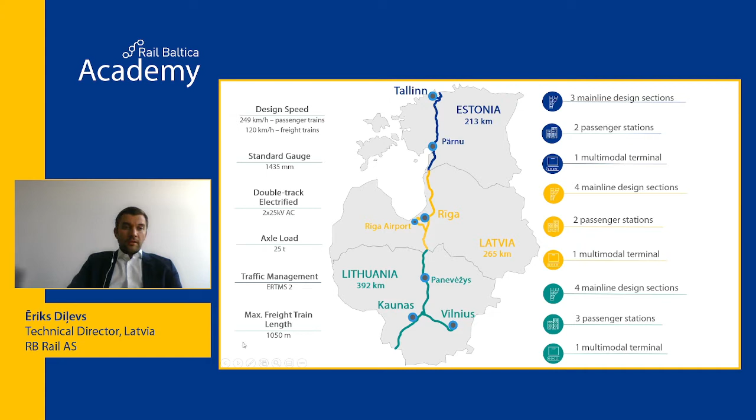Now let's jump to structures and how they're split across all 3 countries. As you see, Latvia has the longest mainline, so it also has the majority of structures. In Estonia it's a bit less, 121, and in Lithuania, 107.

We also have different separate structures which are not so common in everyday designs in the Baltic states. Here only several are listed, but we have more of them. Some of those I will present in the next slides, as I would say those are definitely among the top 10 construction objects on the Rail Baltica line. But of course we also have many others, such as passenger stations and so on.

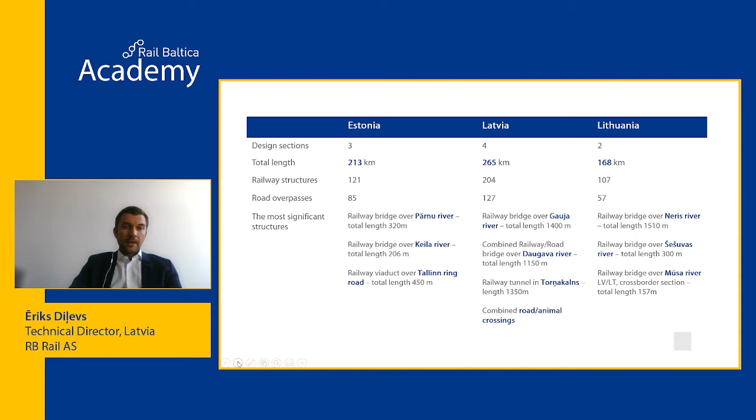Here you can see the breakdown of structures per each design section, as I mentioned before. In Estonia we have 3 sections, and here you can see the number of structures in each. Design section 1, the mainline through Riga, has 67 of those. In total, in Latvia we have 204. As some designs are still in the value engineering stage, the number might change slightly, but not significantly.

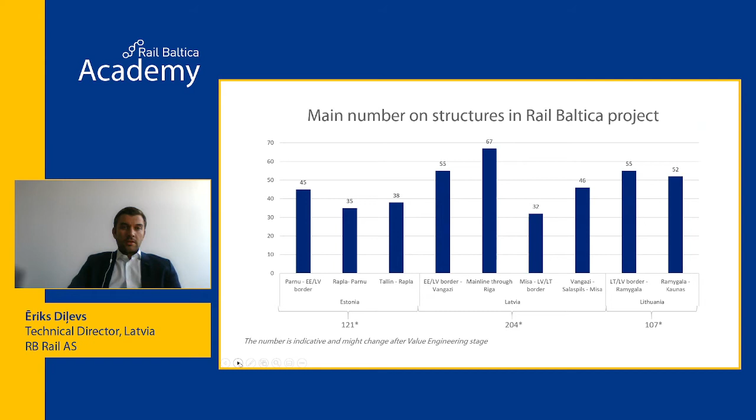So let's jump to the most interesting part. I'll give you an overview of each country. I have listed some of the most iconic structures worth thinking about for the future, which I would like to present to you today.

So here you can see we are adjusting 2 additional tracks of our Rail Baltica line, and here is the existing 1520 tracks, which is currently serving railway transportation for Tallinn city and for whole Estonia. And this will also be a multimodal hub in Tallinn, linking the Tallinn tram line, different bus routes, and other public transport systems.

Yes, so it's a very iconic structure to be designed and constructed. Currently it's under design stage, and the first stage of construction works is about to start this year. The consultant is the very famous Zaha Hadid Architects - I think you have heard this name. They have designed many iconic buildings throughout the world, and they also have a local subcontractor, Esplan. The contract value is 2.6 million euros. So yes, this is currently under design, and we have already reviewed the first incoming design deliverables.

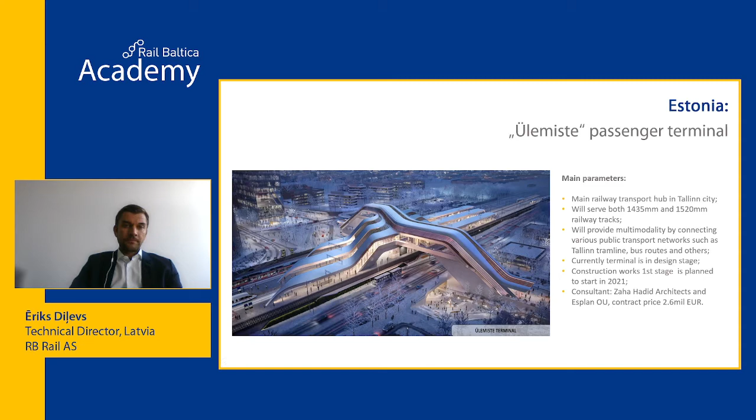Then if we go further down the line, here are some visualizations from our south section, which is Pärnu towards the Estonian-Latvian border. Here I have listed 2 different station examples. This is regional station Kilksama, where you can see the idea of how the Rail Baltica line will cross different villages and districts, and where we are providing regional stations. Those, of course, are not as big as you see on the right side - I will tell about this a bit later.

But here what I want to point out is that we are providing full multimodality even to this small station - there is an access road, a road overpass, a parking lot. So with this project we also want to ensure that there are proper facilities provided to the local inhabitants, so they can park their car, jump into the train, and go wherever they want. We need to provide full service for all the passengers and inhabitants in the regional districts we're crossing.

And on the right side, you can see Pärnu passenger terminal, which is of course smaller than Ülemiste, but also showing you an example of how we're going to provide this multimodality in Pärnu, linking different public transportation systems. And here on the left side, you see the Pärnu River, which lies right next to this station.

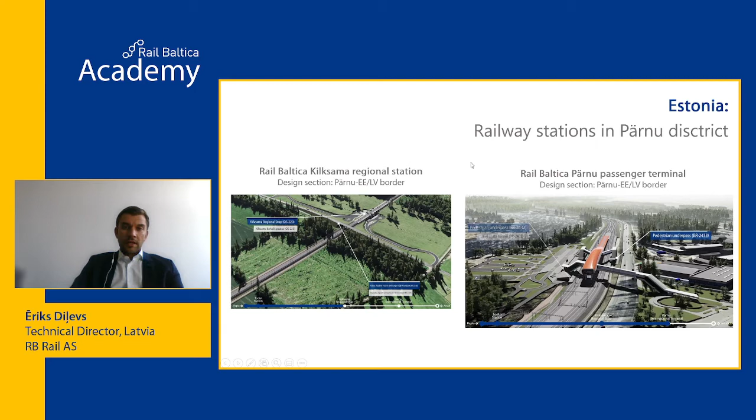Then I touched already on the Pärnu River - so one of the biggest structures in Estonia is the Pärnu River Bridge. Some of you may think 320 meters is not major, but this structure is also a bit unique in that the Pärnu River has challenges with high water levels, and there is ice flowing during springtime, and this is one of the challenges we needed to face, because there are local roads below the bridge deck, and the water level changes quite significantly. So we're carrying out different hydrological studies and investigations on how to tackle it, how to properly calculate the highest water level, ensuring the local roads are not flooded and ensuring safety.

So about the bridge itself - it's a steel girder with a concrete slab deck, 6 spans in total, and the middle span is 100 meters long. The bridge deck is 20 meters wide, and the height is 3.0 meters.

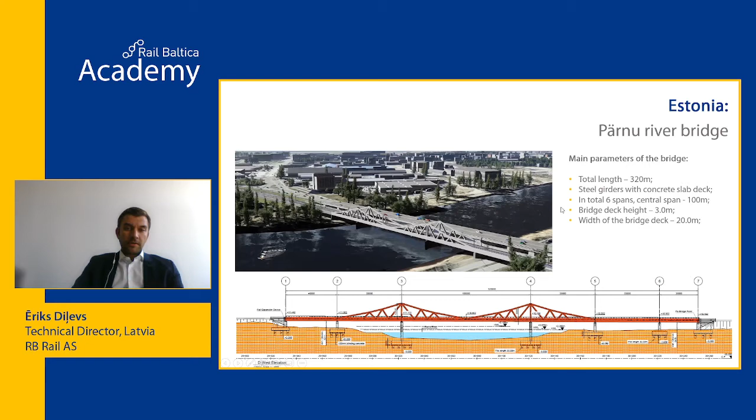So let's go to Latvia. As it was already said in the Facebook announcement, you will know something about the unique first combined structure in Latvia - I would say in the whole Rail Baltica railway line, but it's located in Latvia - crossing the Daugava River, a hydroelectric power station, and this pond. It's really something unique. This strategic decision was made last year by our Minister of Transport. Basically the idea is that it will ensure the full integrity of both infrastructures, road and railway, as the plan is also for the road administration to cross in the same proximity with the A4 Riga bypass road.

So different studies and analyses were made, showing it would actually be more feasible to combine these two infrastructures and cross in one location. So we started to investigate and study this proposal further, and currently we are under design stage with this huge structure. Similar ones you may have seen over the Øresund Bay, owned by Denmark, and also in Khabarovsk, where basically the highway is on top of the railway.

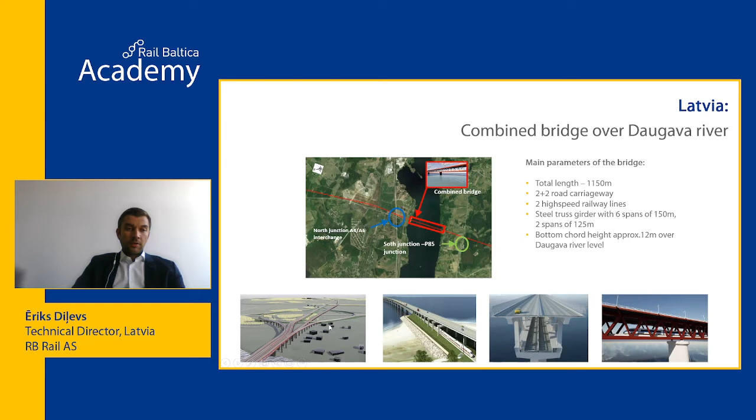If you go into more details about this specific structure, its total length is almost 1.2 kilometers. We have two high-speed railway lines below and 2+2 road carriageways on top. It's a steel truss girder with 6 spans of 150 meters and 2 spans of 125 meters. This box girder, which you see here, is 12 meters in height. And of course this is not only the bridge, but also the surrounding adjacent interchanges, which we also need to redesign, and that is growing quite huge in size - I will explain more in the slides later.

Here is basically for you to understand how this one pier would look like during construction. It's not something very easy to construct, to provide this whole structure above. You need to also have proper foundation and proper piers.

This is a typical construction method for building such piers inside rivers, where you have the sheet piling, then you pump out the water and do all the concrete pier works and the rest of the necessary works. As mentioned before, we have a total of four traffic lanes.

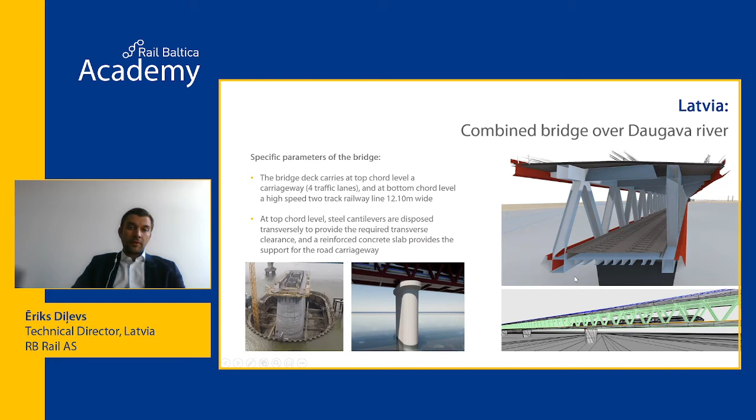We have a railway track below the roadway, and basically 12 meters from this bottom chord. Chord is basically what these truss girder beams are called, the top chord and the bottom chord. Till the water we have approximately 12 meters of height clearance.

What lies also together with this combined bridge is the A4, A6 interchange. A4 is the Riga bypass road, A6 road goes towards the east of Latvia. Just to cross this interchange, we need to do major redesign and reconstruction works.

Currently this interchange is a small, I would say, trumpet type interchange with only 2 levels. But with this infrastructure, where the railway is also coming in, this interchange is now a 3-level grade separated interchange, where the A6 highway is at grade level, Rail Baltica railway is at the 2nd level, and A4 highway is at the 3rd level.

Of course, we are trying to ensure all the constraints that are there, like existing houses. We are not trying to touch them as much as possible, trying to avoid them. This is currently under design, and I'm looking forward to seeing how it's going to turn out, what the final solution is going to look like.

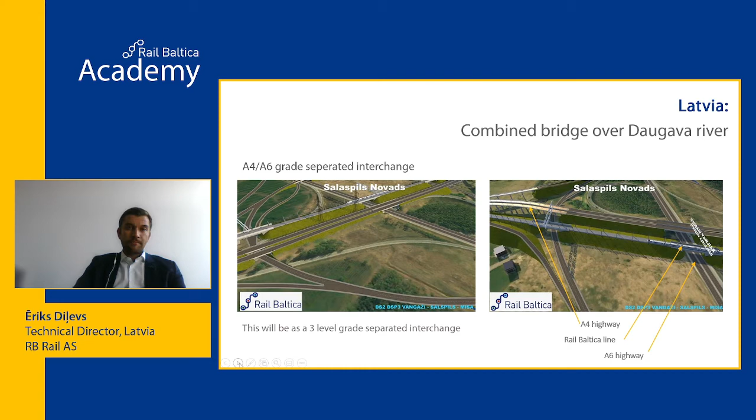The next iconic structure we have in Latvia is the Gauja River Bridge. During preliminary design, it was foreseen to be 1.7 kilometers, which would make it the longest structure in the whole railway line. But currently under the design stage, the consultants have studied it more closely, and we see that it can be shortened to up to 1.4 kilometers.

What is tricky about the Gauja River Bridge is that, as you see on this right side, north is on the left and here is south. We have this Inčukalns that connects high pressure gas pipelines. This is also a very challenging location where we have a 330 kilovolt corridor going towards Estonia, which is currently under construction. There is also Inčukalns high pressure gas cells and all this gas pipeline infrastructure, and then also our railway line in between.

So this is a very challenging location. We need to study together with consultants what would be the best location, how to not touch as much as possible all the infrastructure, so we're not affecting it. Of course we're trying to avoid as much as possible, but anyhow, here is an example of how the side pier of the river would look like.

We have a central span of the Gauja River which is 110 meters here. Of course, the central span height is also quite significant, at 7.0 meters, and the central pier height is 14.5 meters. So this is about the Gauja River.

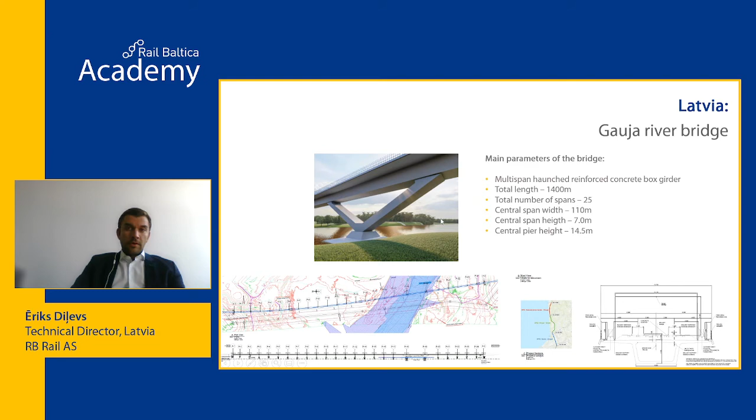Then we jump to the next very complicated area. This is the main line of Riga. Those who live in Riga know where Torņakalns is and where our central station is. This is where the first railway tunnel in the whole Rail Baltica line will be located.

I would say this is the most complicated section in the whole railway line, because our railway corridor is going next to our existing 1520 railway tracks. Those tracks basically go to the south of Latvia and to the west of Latvia. There is one specific location where the Rail Baltica railway crosses the junction of those two lines, where one line diverts towards west, another diverts towards south of Latvia. And also our railway line is crossing those two lines.

According to our design guidelines, there are no at-grade crossings allowed, only two-level. That's why the only option, I would say the best one, which has already been studied and approved, is this railway tunnel. The tunnel itself is not as complicated as you would see, for example, for different railway tunnels around the whole world.

From a tunnel perspective, it's not so huge, but it's complicated because of the different railway operations we need to also provide during the tunnel construction stage.

Initially, the tunnel was planned to be 2.5 kilometers, ending after this street. However, consultants during design studied different risks, such as this river crossing and the whole capex of the tunnel, and found it more feasible to shorten it, because the critical part is basically where we need to cross these two existing railway lines. So currently the total tunnel length is 1.3 kilometers.

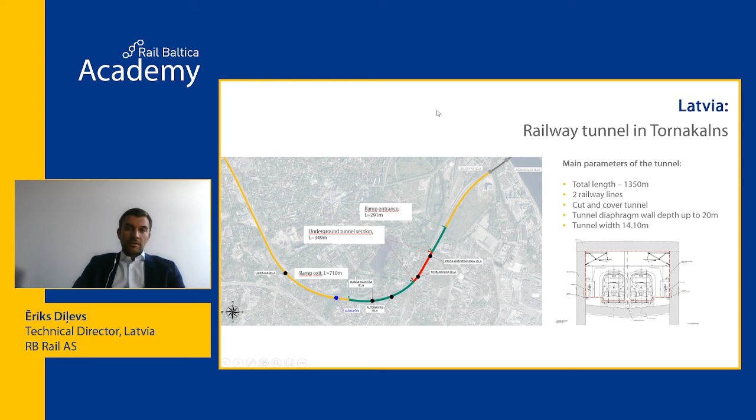So then more details on this cut and cover and top-down construction. As I mentioned, in other parts of the world this is not very complicated to construct - we have seen different examples of how it's done in different countries. So what is top-down construction?

You start with constructing these diaphragm walls on the left and right side. Basically, you drill huge boreholes filled with reinforcement and concrete. Then you put the top slab.

Then you start to excavate the material inside from one end and the other. So gradually you go line by line down towards the bottom, once you have excavated the full amount of these materials. And then you basically put back the top, and here you go - your tunnel is constructed.

This is one of the best solutions for constructing such cut and cover tunnels, also to have less impact on railway operations and to provide the best possible solution. With this solution we also need just one common pumping station at the lowest part of this tunnel. So in real life, how does it look?

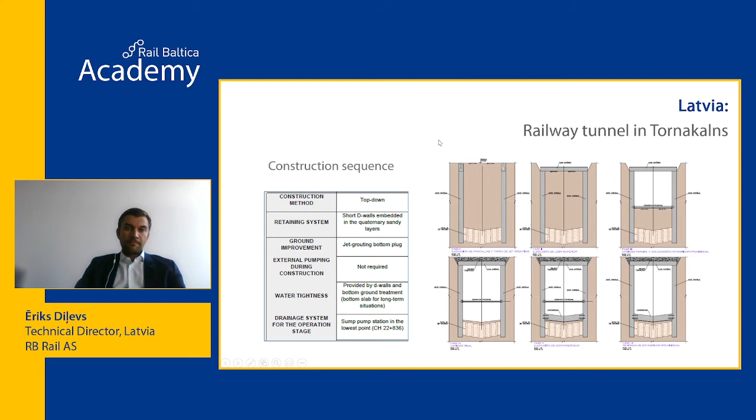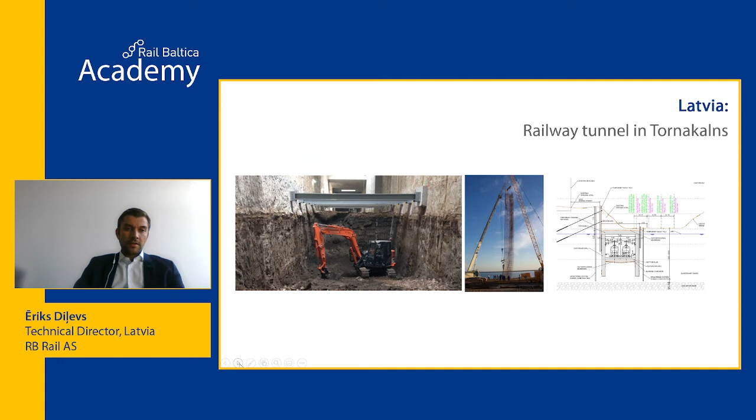Anyhow, consultants are studying this further, doing more details, and we will provide more information as the design goes on.

One thing I want to also mention, which is a bit iconic here in the Baltic States - what we are currently designing are these combined road-animal crossings. This has not currently been designed in the Baltics at all. However, it's normal practice in other European countries where, for example, some greenfield objects cross forest areas, and our project's aim is also to save as much of the environment as possible and not affect it at all. So we are speaking about animals, about how they're going to cross our railway.

So we also have pure ecoducts, without any additional gravel road stretch in between. However, for areas where traffic intensity is very low, like a couple of cars per day, and where there's also an ecoduct nearby, there is a solution to combine it. It's not that animals would be afraid to cross it - it's just to provide them the best environment on the left and right side, a stretch of green space where they can comfortably cross the railway.

The typical lengths of these structures are 66 meters, and the width of the structure is 22 meters. So here 7.5 meters is gravel road, and then on each side we have a total of 15 meters of animal walkways.

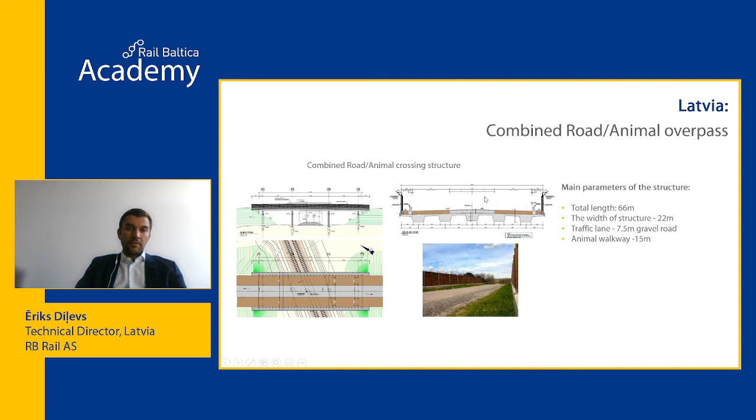Here you can see how it looks in real life, how other countries have implemented it. Here you can see a stretch of the gravel road, and here is enough space of greenery where animals can easily cross the transport corridor. This is something we are aiming for in those places where we need to combine ecoducts and minor road crossings, forest roads. Of course, as I mentioned before, we will also have proper ecoducts dedicated only for animals.

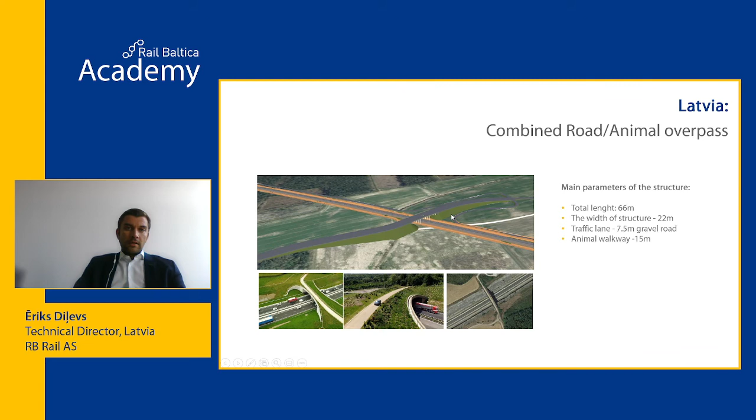Then let's jump to Lithuania. Of course, everybody knows this Neris bridge, those who are Lithuanians. Those who are not, I would give you more details about this iconic structure in Lithuania. Indeed, this is the longest structure in the whole railway line, Rail Baltica. It's 1.5 kilometers long with a central span stretching 150 meters.

Why is the central span so long, and why are there no piers in the river? Because this is a Natura 2000 territory, and due to different constraints of this Natura territory, we are not allowed to put any piers in the river. Of course, we are also thinking about different environmental constraints, and this is not our objection. We always look forward to collaboration with different institutions, affected parties, and authorities. That's why the central span is 150 meters long and we don't have any piers in the river. Piers are only on the side banks of the river.

The number of spans is 29 in total. The highest bridge pier is 37 meters, which is quite tall. As the structure is so huge, the number and lengths of total bored piles are quite significant. We have almost 7.7 kilometers length of 1.5 meter diameter bored piles and 2.2 kilometers of 1.8 meter diameter bored piles. This doesn't mean the piles themselves are that deep, it's just when you count all of them together. But the number is quite significant for a typical structure in the Baltic States.

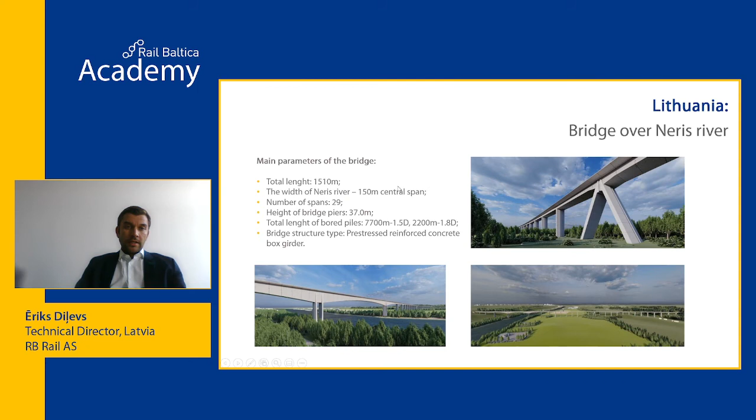Here in the bottom picture you see where it's located, almost approximately in the middle of the structure. Then how does it look from the design perspective? Of course, you heard that Rail Baltica is also providing BIM solutions, and we ask our consultants to provide all design solutions in a BIM environment. I will explain a bit later how it looks.

Here in this slide you can also see how the BIM model actually looks. Before you saw the visualization, and here it's actually a direct extraction from designs from the BIM model, where you can see the pile cap, the bored piles, the pier, and the bridge deck. Here, for example, you can see some utility crossings and other infrastructure that is present in this model. Basically, the BIM model includes all the necessary information needed to construct, and it's given to the constructor so he can already provide the right estimate with as little contingency as possible. Also, by clicking on each element, you can get information about the concrete class, the quantities, and so on.

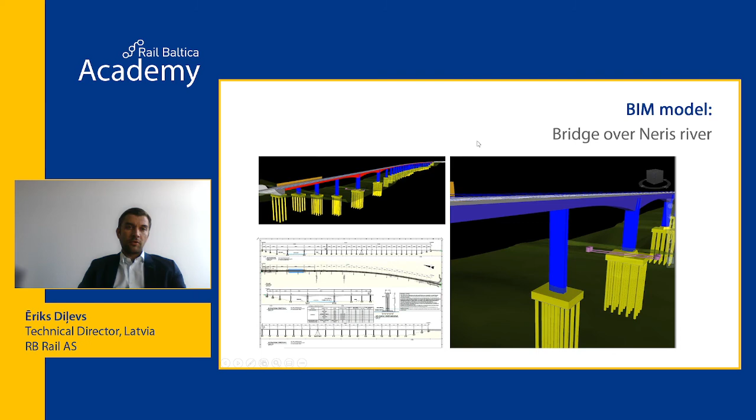This is one of our aims in this project, to develop BIM technology in the Baltics in general. As you know, in other European countries it's already well developed, and it's normal practice to provide design in a BIM environment.

Another iconic structure in the Rail Baltica railway line is the Mussa river bridge. Why iconic? Because it's right on the border of Latvia and Lithuania, with the border in the middle of the Mussa river, which our railway line also crosses. This is challenging because we have two different country legislations that need to be combined in one structure, and we need to provide proper design acceptable to both parties. The terrain is also a bit different on each side of the border - here is Lithuania, this is Latvia.

This is currently approaching the master design stage. We are in discussions about the vertical parameters of this structure, but more or less it's already set. This is the type of structure it's going to be - basically a post-tension concrete box girder. The total length is almost 160 meters, and the central span width is 65 meters. It's also pretty high - the central span height is 5.0 meters and the central pier is 12 meters.

This is the current situation - this is the Mussa River, how it looks like, and here is basically how it's going to cross it. This is an example where, in solutions where we cannot put scaffolding or formwork inside the river, it's possible to construct from each side of the river bank using the cantilever method. Basically we are constructing the bridge from the bridge itself - putting formwork, pouring concrete, approaching from the left side to the right side, and once we complete the middle, the bridge is constructed. This is one of the construction methodologies we intend to use for such structures.

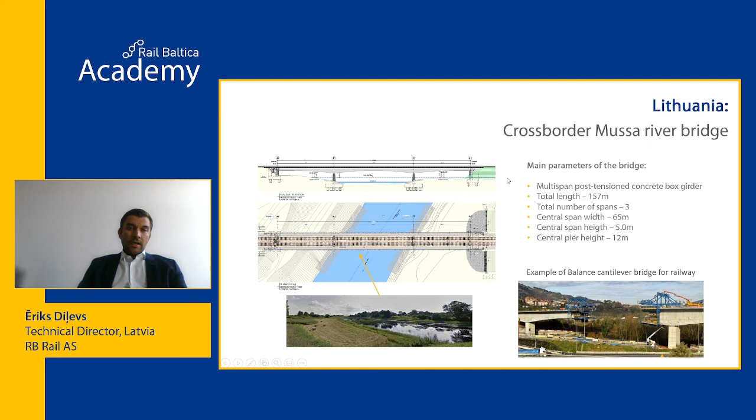Last but not least, as I mentioned, the BIM environment in the Rail Baltica project. As you can see in these videos, we can zoom in and click each element. Each element shows the parameters, the concrete class, the quantity. As I mentioned before, our intention is to give as much detail as possible to the constructor with these BIM models, so they can estimate and get all the information in the design, and provide the price estimation for these works.

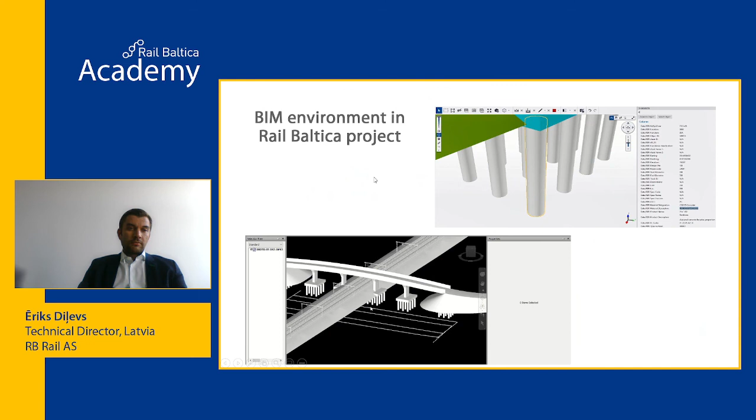This is, I would say, a small insight into our everyday work in Rail Baltica design and this mega project, and how we are moving on.